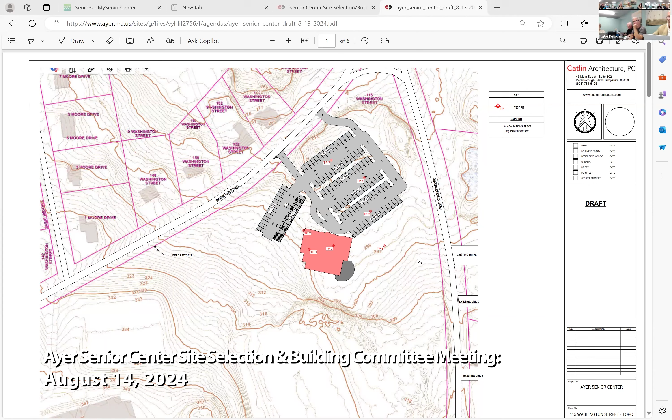It's a little bit more straightforward, but it's a straight shot on a much quieter road. And there's both a plus and a negative. The plus is that it's quieter, the negative is it's a little bit farther out of the action, if you will, in town.

And both sites, no matter where we dug, were pretty good. This one had no issues. And the other one had a few, but they're deep enough that I think we're okay. Even if we dug somewhere else, I think we'd be fine, unless you went up the hill. And in terms of vegetation, there's a lot that can be done as we work through this - there's trees we want to save and trees we might not want to save.

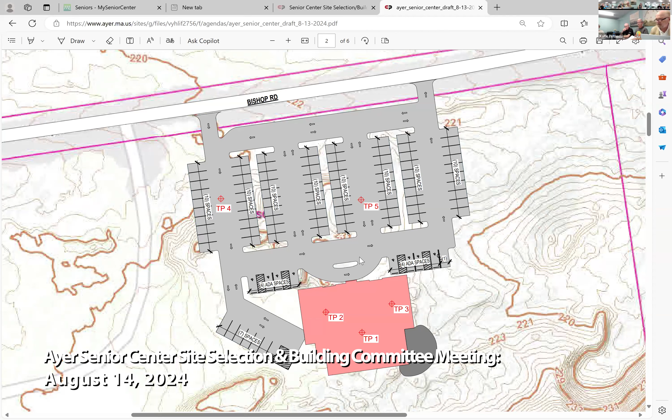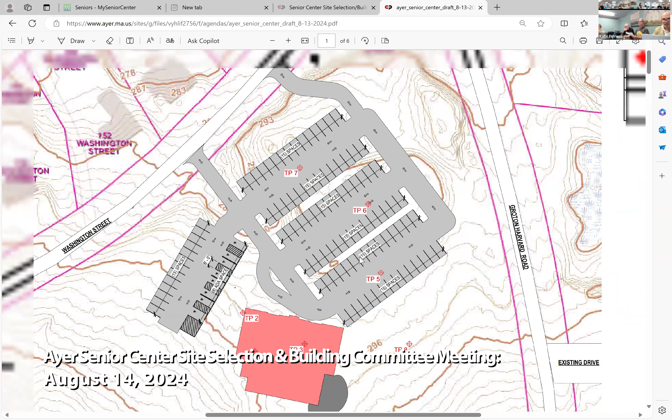But I think that report works well, and I think what you want to do is think about our idea - one of the problems we have with our elder centers is making sure we have safe access in and out. And the one thing we do, we've been doing it for about 25 years as architects, is that we like to have one way in and one way out. It takes about two weeks for everybody to figure that out. We have lots of signage, but people learn that this is where I exit and this is where I enter.

Because in the past we've had problems, or seen problems from other centers, where people are getting too close together, and some of us don't stay in line. And as my team says, when they ride with me in the car, I'm one of them that does.

So when you're basically saying, John, that instead of having - let's say we went here and we had a double barrel entry with an island up the middle - that you would still recommend going to two rather than splitting this conservatively, so you would have a general idea that you're going in and coming out.

Well, the nifty thing here is that when you come in like this, I see that - you're exiting out on the passenger side to the building. And when you stick them together, it gets a little bit trickier. You have to peel off people, and what'll happen - yeah, it gets confusing. We just find that this way is better, a good example is Long Meadow.

I've talked to them extensively about this parking lot, which has been there for 3 or 4 years. When it first opened, it was confusing for everybody, but now they say it works exactly the way they wanted it. It's really important to park cars where they stop without getting over the line into the other parking space, so we create a walk area that's safe from the parking zone, with crosswalks here.

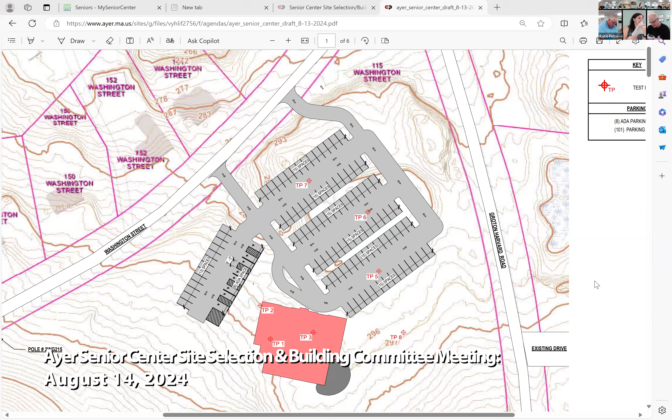Well, I know Carolyn originally walked up there, and I think Ken and I, for me, the Groton Harvard site was initially preferable, but a large portion of my preference derived from the fact that the building would have access to the playing field out the back, and there would be an easy way to integrate what's going on in the senior center with the use of the practice field during the day.

But it seems that trying to squeeze the building in there, both in terms of parking, travel on Groton Harvard, and the availability of parking and the potential for more ledge there than down below, would argue against those sites.

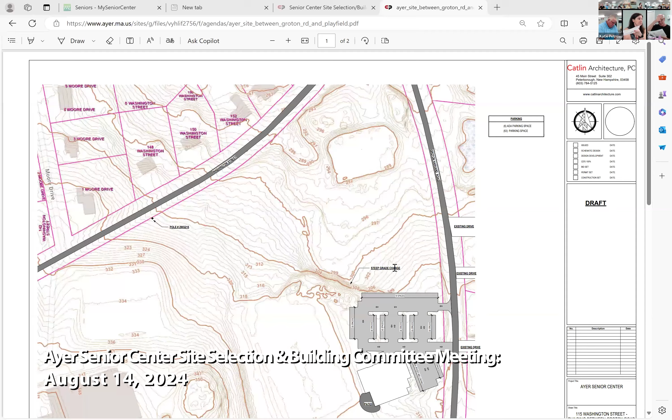So for me, yes, I would concede that those sites are less viable than the ones John has outlined as being further down. But again, the detriment for me is that then, you know.

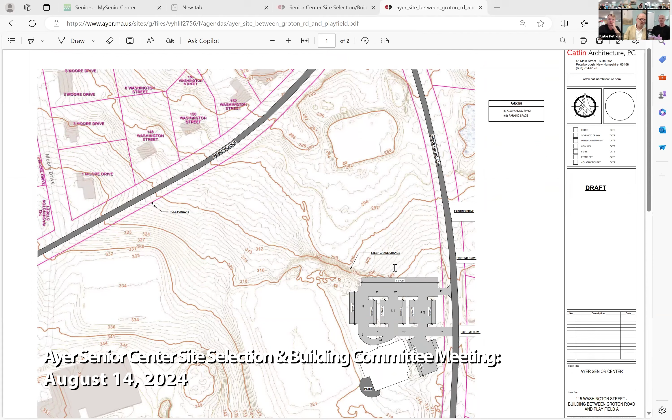Well, maybe what we should do is look at how the access could be to those fields. I don't know, we have not - this is a feasibility study. A lot of that gets worked out ultimately in final design, but I think it's worth our effort to look at that.

A good 15% of our seniors have mobility issues, and they're not going to be tromping up to the fields. They won't even be using the stairs on a two-story building, they'll be using the elevator, and there's a good reason for that. But there's a whole group of seniors who will tromp up to those fields or walk the stairs.

I think we did a study in Holyoke where we found 87% of everybody who used the senior center used the stairs. Sometimes some of them didn't use the stairs because they went up with a friend who had a walker, but it was a very high percentage.

And the one thing we're doing is really promoting physical exercise, whether we do it with a fitness center, with a treadmill, a bike, or whatever, or whether you can do it outside. We're talking about having a walking track around the building. That is a real concern of ours. We think that's a pretty expensive item, but we're going to have it budgeted in. It's also kind of an aesthetic issue too, trying to work out the grading around the building.

So we'll look at some of that when we get to the next level. But I can tell you right now, I'm going to be 80 shortly, and I just played a squash game for 2 hours this afternoon.

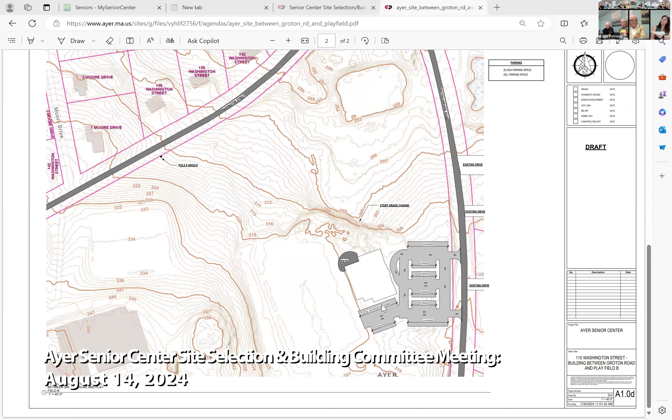In particular, like Dennis, I was hoping the building would be able to fit up the street in these spots we just looked at. But after I walked out there the other day on that site again, I found it not as steep as I thought it was going to be visually. Interestingly, I'm not so sure the grade shown here is right.

When I was out there, I found that you could walk. If you built a walk out this way gradually, you could hook it up to the field, not steeply, but kind of work it around. It could be ADA accessible, actually. Right, it probably has to be, but along more of a curve.

Now the other thing I had was a total blowout idea like yours. I like this kind of built idea, a bridge off the second floor? It may not be a bad idea. To where? Right to that field, there's a short distance if you go right across off the second floor.

The second floor is quite a bit lower than the field. You can see the elevation difference, you'd still have to walk up to the next field. Yeah, so it's a tricky situation no matter what you do.

The town and the school district, it's tricky. The high school in Harvard has a bridge that comes off the second floor to access the parking lot at the Bromfield School. They just redid it.

I wonder how much that was. Well, I'll endorse your wild idea too, I think it could also be something done at a later date.

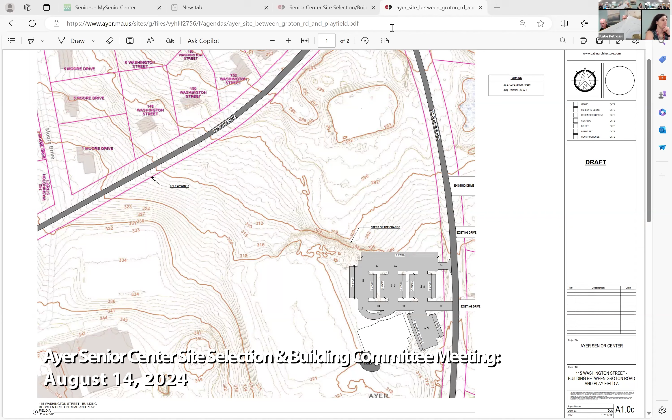When you're up here and closer to the road, the traffic is going to be much more evident that you're going by the street. When you drive in here, this is going to feel like a private spot once you build it out, because there's protection everywhere around it. So it's a nice wooded site.

The swimming pool's going to be really... it's kind of just difficult to get from there to the field. Circling back, I think I agree with Dennis.

I like this layout, the most up-to-date one with the two driveway cuts on Washington. I like that better. I agree. This feels like a pretty nice private site.

One drawback on Bishop Road is the unknown about the utilities. I can tell you right now, unless you can get somebody else to fund the power, it's really hard to bury that into that budget. You're going to end up shrinking the building one way or the other, because right now construction is really high.

It's not growing like it did two years ago, but it's still moving at a pretty good clip. I've not recently updated myself with my cost estimator, but a year and a half ago we were working on another project and the numbers were not pleasant. If we took the numbers from Wilbraham, the most recent one, it's a pretty stiff number, about $750-800 a foot, not soft costs. Those are construction costs.

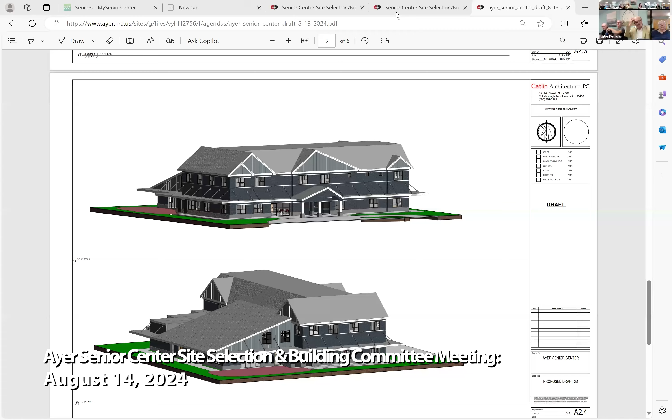The floor plan. I promised my partner in life I'd be home by 10 o'clock. Where do you believe you have to go to? I'm going to an island in New Hampshire, midway up. How long does it take? Longer than I wish. I checked it out when I got here — it's about an hour, just shy of two hours in the dark.

I'm sharing now the latest floor plan. This is the first floor. One piece of feedback — I've been talking to some of our current senior center users because it's easy access, and some of our regular users. One point they brought up, John, is let's say we've been talking about the large multipurpose room being able to be kept divided for lunch most of the time.

And then it's joined into the larger space for big functions. But the patio is on the opposite side. Yeah, and I've noticed that I think that's that way in Wilbraham as well.

So some people are asking questions, well what if it's a regular lunch day and there's a midday program or exercise class going on, but we want to eat lunch outside? What are your thoughts? Well, at Long Meadow we do eat outside because it's dead center, and the patio can be moved that way.

We wanted to also be somehow connected to the lounge library, because there's a lot of action there. There is a separate patio for the cafe out front. And there's no reason why the patio doesn't come around. We just limited its size for now, but it could be smaller over here and come around and grab the rest of that.

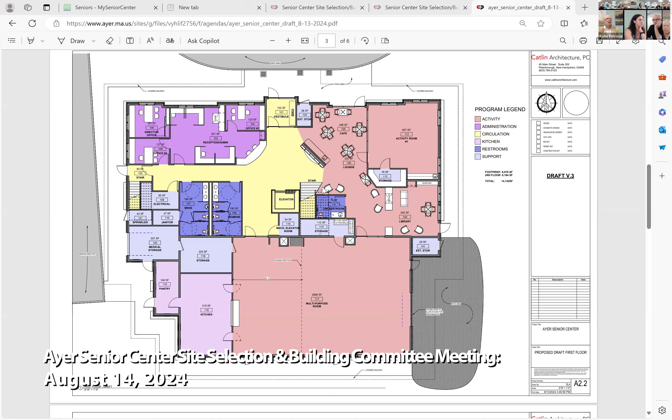So one thing for us to think about is, is it preferable that the patio connect to the library and be somewhat closer to the lounge, or is it preferable that it connect closer to the kitchen and the other side? So you're saying that they're outside the cafe, not the library side, but the cafe side, so the front side of the building, there'll be space to have tables and chairs outside essentially the entrance.

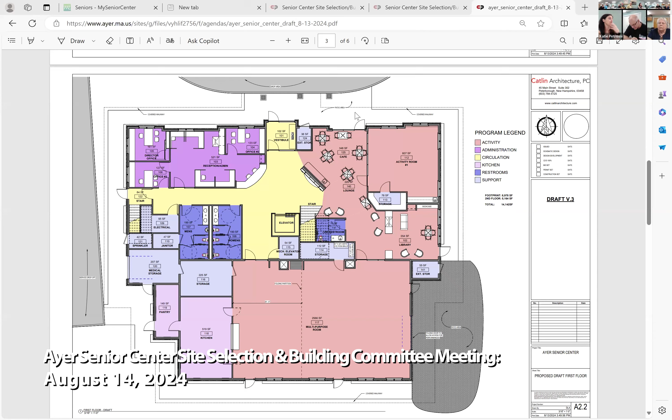You could easily just put a patio here, have one here, they're connected by the walkway. It's smaller here, bigger over there. We have one here - oh, that's the cafe. Right, but you were talking about this. No, she's talking about this.

So some of the feedback I got was that this is where the line is here for that partition, and that this would be set up for lunch for 40 or 50 people all the time. And then exercise would be going on all day long, kind of in this room. But if somebody wants to eat their lunch outside, they've either got to carry their plate through the exercise class or go across the building and go down. I thought that was great feedback.

Then on the other hand though, you have to be considerate - obviously it depends a little bit on the site placement. But you also wouldn't want the patio right next to the service entrance to the kitchen and where the generator would be. I think that's a great point, and Dan and I will come up with an answer for you.

In Long Meadow we don't have that problem because the patio is connected to the main area. Our multi-purpose room is actually smaller in Long Meadow because they have a gymnasium. And also, we did not do it here, and you may have seen it - if you've been to Wilbraham, it's not a raised platform, but in Long Meadow we have a raised platform connected to the patio outside.

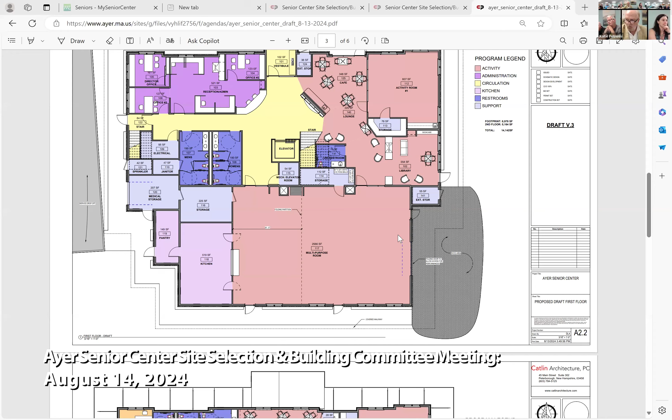And then for presentations we didn't do that here - we thought it might be a little expensive. But what we did do is this: we have a door that opens up all the way and allows both a performance or talk here and out here, or it can just be open between the two. There's no reason why this might not also occur over here. The actual patio is not a highly expensive item - the building is what it's all about.

And also we can put, you know, different ways of doing the patio as add alternates as part of hitting the budget. Just like we often put the movable partitions as add alternates because you can put those in at any time. We put the structure in for it now in the power, but we don't necessarily - this one here is an $80,000 wall, the one upstairs is about $45,000. So those are add alternates, and we play that game because we want to hit the budget. You can, if you're within 10%, most towns dig into their contingency.

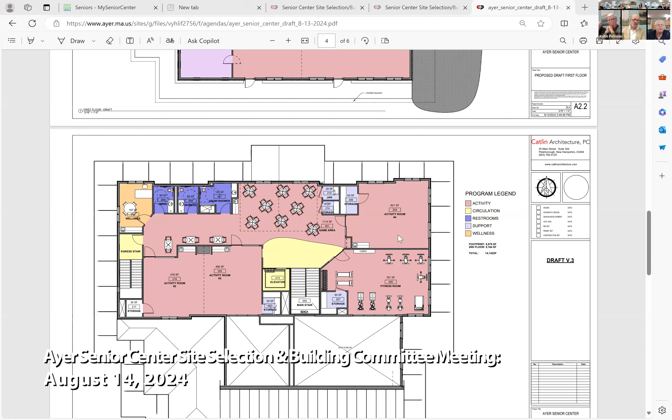I don't recommend that. I like contingencies, but because it's new construction, we generally carry a maximum of 7.5% contingency. Our experience to date is that we've rarely exceeded that. So we get kind of flexible toward the end, and if we see a lot of money left over, we can put the wall in.

That's why we do estimates as we go. Part of that estimate process is starting to talk with you as a committee about what is a reasonable add alternate and what isn't. We usually limit ourselves to about six add alternates. We don't want to get it too complicated for the bidders.

Yes, I'm sorry, the drive-up portico is still not there, which is something I feel very strongly we need to have, because we saw it at one of the sites — a van of special needs people getting off and having to sit in the snow in their wheelchairs, because there was no place to take them out that was protected.

Well, all our centers have a porte cochere that comes all the way out to the actual spot where you get out of the van. We don't go over it, and I'll tell you why: in many cases you'll come in with a bus, and you have to raise it up to clear the bus. If you don't, I can assure you, I've seen it — they hit it and damage it. So you'd have to go all the way up to the second floor for that, and it's crazy. We avoid those like the plague. We've never had any complaints about how we build it right out to where you exit your vehicle, and you go directly underneath the covered area.

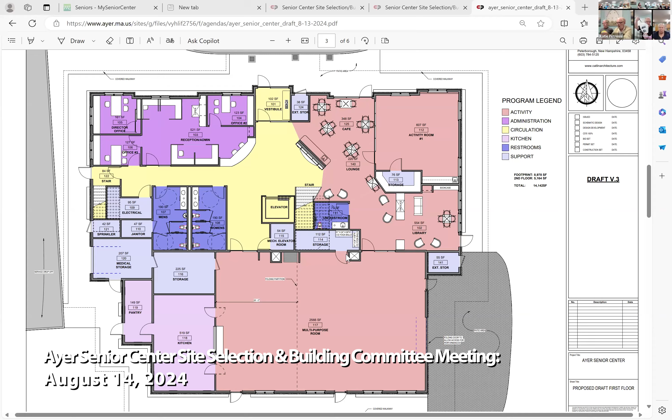If you look at it, it comes right smack out to where the curb is, and this is a zero curb. You wheel your wheelchair right over it, and you're immediately underneath cover. There will be a couple of bollards there because we don't want people driving into the building.

We have found that effective. You can certainly talk to the directors of other centers, but when you do, I can give you some images. If you go down to Rochester, they have a porte cochere. Groton has one too, but it's a very different building — it's flat roof.

So if I look at the second page of elevations, giving the actual heights for the second floor — I see you've noted 13.6 feet just at the floor. Right, so our van, for example, requires a 10-foot even clearance. That gives you an idea, Ellen — any kind of structure has at least 18 to 24 inches of structure from the deck of the floor down. That's what I was trying to get a sense of — you could see, Ellen, where the 13 feet, that's the 13.6.

That would be where the top deck of it would be. Essentially, because it's 2 feet of structure and we would need 10 feet clearance.

Well, I went over today to Devens and looked — they have two hotels with little porte cocheres, and one is 12 foot and one is 14. So you're saying we can't put out anything — how many stories are the hotels? About 4 stories.

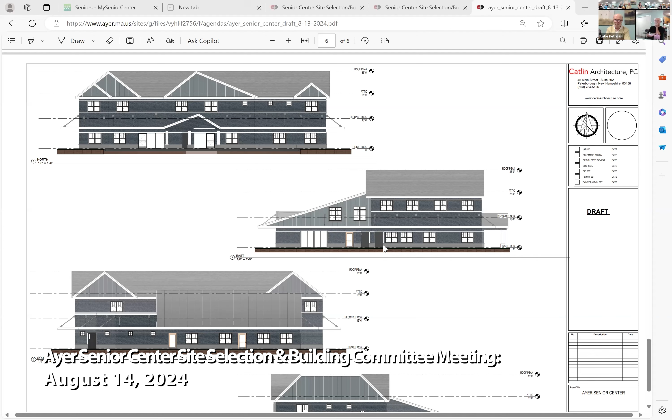In Duxbury, we built a porte cochere, and about 18 months to 2 years later, a bus drove into it and dislodged the whole thing. It's really, I can show you some images.

There is another solution too. If anybody's been to Chicopee, it's a lot more modern, but it's not dissimilar to the way we're trying to do the walkway.

We also did this in Lexington, Kentucky. We built right where these columns are in front, continued them along, and projected up high, a big cantilever space up high that clears everything so the buses can drive underneath. And generally a straight down rainstorm or something isn't a big issue.

But a lot of these things, right now, if I pull up with a van with handicapped people in it, I'm dislodging them right at the canopy, and you're immediately underneath that canopy. Nobody's sitting in the snow or in the rain. You may get a little damp.

That one you're talking about doesn't have a cover over its sidewalk at all. Which one, are you talking about Sudbury? No, she's talking about this one right here. The one I saw where they didn't have anything. Is that what you're talking about? That's the Devens, the hotel. No, I'm saying the one you're talking about where people were sitting out in the snow. Yeah, they didn't really have that much of anything. I think it was Sudbury. Sudbury, John, didn't have anything.

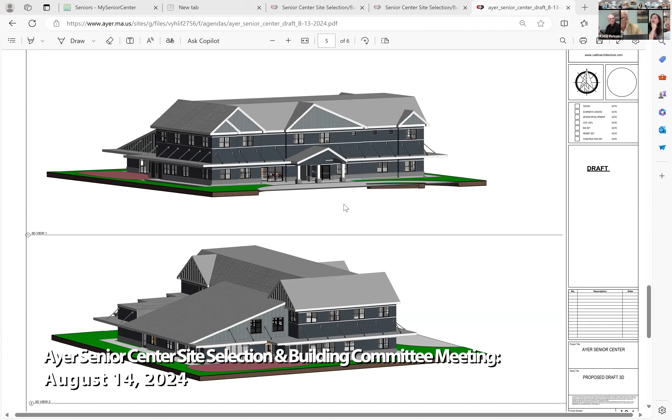Well, let's look at the second floor briefly, because there were a couple of changes there. We reduced the glass going into the second floor. We moved the fitness area over here and put a divider in it, so you get two different classroom activity rooms. We left one activity room here, and we reduced the amount of glass to kind of peek in rather than glass all the way across, looking down.

Although when I do my yoga work, I don't mind the girls looking at me. Maybe you don't mind that.

I noticed that the dormers or whatever on the roof, on this elevation, look asymmetrical. Is that just perspective? Nope, they are asymmetrical. I hate symmetry as an architect, but you may love it.

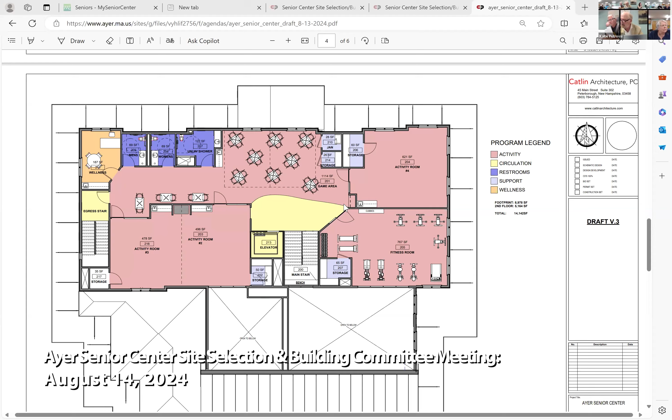We did two things asymmetrical. We did this one reversed and this one the other way. It's more of an architectural aesthetic.

The one problem I have with all of the elevations is the walkway. I'm not a big fan of it. We're trying to suspend it because if we had to build columns all the way around it, it would cost more. You wouldn't believe how expensive it would be to have columns around the walkway all the way around the building. So what we did is we're hanging it off the structure.

I'm not a big fan of that either. What we're trying to do with that walkway, and I'm not disparaging it, is get a walkway that we would have had in a gym, that we don't have a gym, so. I think we're artificially trying to create a walkway, which, by the way, in the dead of winter with the wind blowing, snow blowing, I don't care if it's got columns or not, it's not a pleasant area to walk. It's good in the rain, probably, if it's a nice steady rain.

So when I was originally proposing this idea, I was envisioning it more like a farmhouse concept with a wraparound porch, which would include the columns. But having the columns would allow you to add isinglass at some point later if you wanted - that's a boating word, isinglass, like the windowed side of a wedding tent - as a thing later. This obviously doesn't allow for that, because as this is designed at 6 feet with a cover over it, it'll help at noon in the summer with a straight down rain, but it's not going to do anything for winter weather.

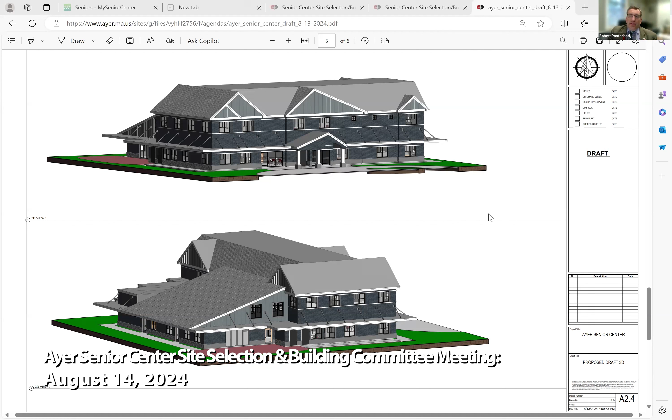Madam Chair, members of the committee, I was just going to suggest, and these are all very important details, but perhaps shifting the focus back to the issue of selecting the site, whether it's Groton-Harvard Road or Bishop, and the criteria the committee is going to use to do this. I know you did a rating exercise before, and perhaps that rating exercise could be done again, adding some categories. One would be estimated price, which we talked about earlier, which we know some work has to be done on, not for tonight, but price would be an added category.

Accessibility, I can't remember because I don't have it in front of me, but I think the two next key steps are: one is to begin to develop and shape the price issue, because that's a key piece. And then also the shift back to the site-specific qualities that the committee is going to look at that make one site optimal over the other. Not that all this other information isn't important, but I think the first step is, of these two sites, which one, all things being equal, is optimal and why?

And then, of course, the other piece we've talked about earlier, which we will start, is the price piece and the funding piece and so forth. So I think that's a next big step for the committee: the criteria as to which site you're going to ultimately recommend. Thank you. Thanks for that, Robert.

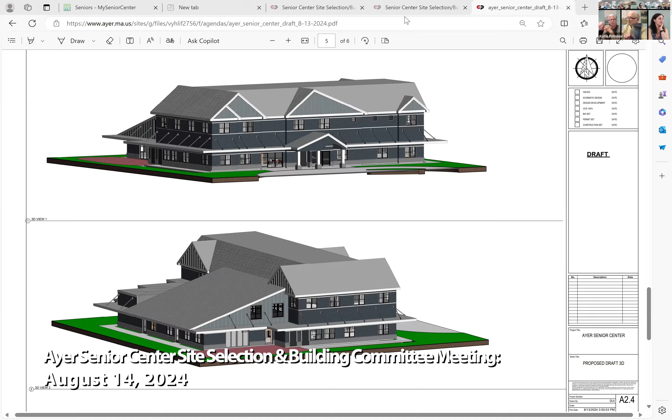So we have, I'll stop this sharing and see if I can find it, the list of criteria we used initially. We've talked a little bit about that. Do people feel like they have a preference? Is there more information? We've talked about needing a cost estimate. Is there other information besides a cost estimate that individual members would need in order to, say at our next meeting, re-rate and make a selection? What are the other pieces we need?

So this was raised earlier and I've been absentmindedly not returning to it: the issue of potential solar panels on the roof, or the extent to which that would appeal to certain green members of the broader community, that the building is climate friendly and solar efficient. Is that part of the conversation in terms of the design of the building or not?

Well, the last three centers, everybody would like that. We designed them for solar. Nobody's acted on it because the funding was not there. In fact, in Longmeadow, we designed the whole gymnasium roof to be a solar roof. We structured it for that. It's been now 4 years. Nobody's moved on it. It was a good sales point, but you should understand...